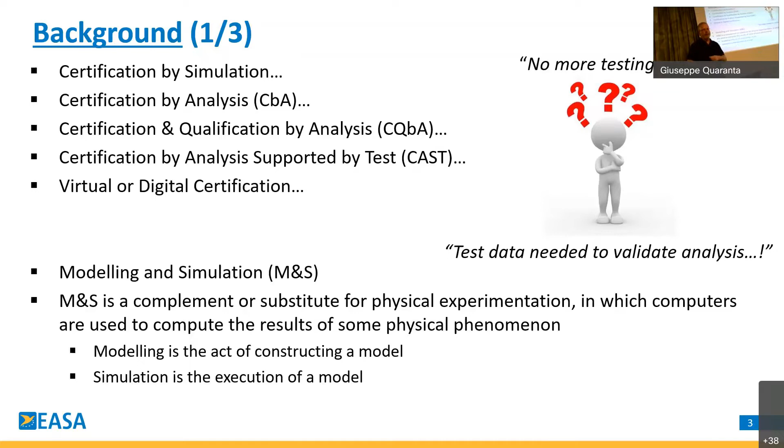Even modeling and simulation covers a lot of different things to different people. In the scope of this presentation, we focus on what we call the certification qualification phase. We're not talking about the development phase, where modeling and simulation is also used extensively, nor about what happens in service, like digital twins or structural health monitoring. We're really looking at the certification phase here.

We're focusing on structures, but within the structures community we have different flavors: solid mechanics, which is static and fatigue; structural dynamics, which covers crashworthiness and bird strike; and fluid dynamics, related to loads and flutter issues. We also have different behaviors - linear, nonlinear, static, dynamic - and different numerical techniques for discretization and meshing, breaking the structure into pieces to make analysis feasible. We worry not just about the solution process but also pre-processing and post-processing. So even within the scope of this presentation, it's already a complex set of activities.

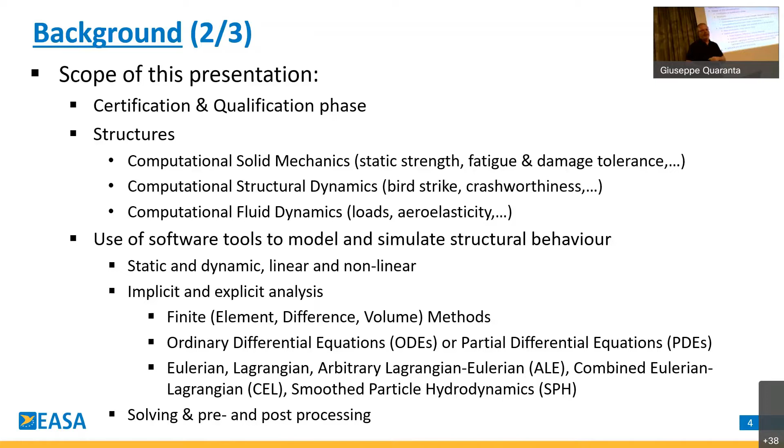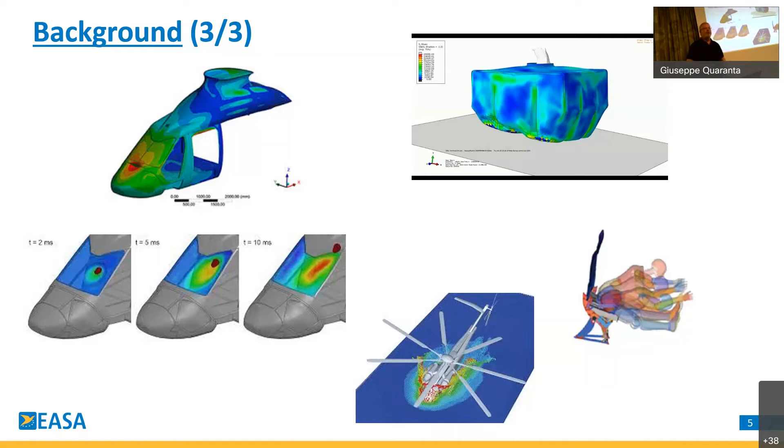So what we see in the structures community, and not only there, it's also happening in other disciplines, and it's also happening outside aerospace. We know that there is an increased usage of advanced analytical means, often accompanied by a reduction of physical testing. That's a trend that is definitely there.

Now, when it comes to showing of compliance, there has always been this mix of test and analysis. If you take a look at 29307, which is proof of structures, one of the key requirements in the structures build, it clearly says that you can show compliance by test only. That's an option, but it's not very often used because it's quite complex to build a specimen and apply all the critical cases. That's quite a challenge.

So in reality, you will see that compliance is shown by a mix of test and analysis. That is not new, but what is new is that the balance is shifting towards more analysis and less physical testing. So from a safety point of view, we're not opposed against that trend.

In fact, we see the benefit. We think that if you use modeling and simulation techniques properly, then you can have a lot of benefit, not only from an economical point of view, a better or more optimized design in the end, but you can also build a safer product simply because you can investigate much more conditions analytically than you can ever do by physical testing. So we definitely encourage the trend as such, but the key concern is always the credibility, or some people call it trustworthiness.

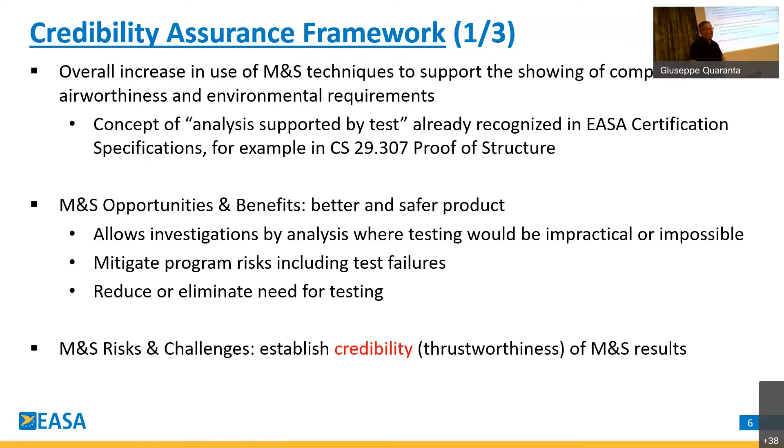So when it comes to credibility, we have developed what we call the credibility assurance framework. It's not something that we at EASA have invented. If you're a little bit familiar in this world, you immediately recognize all the terms. So we didn't invent anything new, it's a reflection of what's already out there.

Going through the elements, starting with verification on the left upper corner, and then going clockwise. The first element we have is verification, and that is both code and solution verification. Code verification is really about showing that your code, the software tool you're using, is free from errors and bugs, as much as possible, but also that the algorithms, the governing equations that you have programmed, work correctly.

Solution verification has everything to do with the quality of the model that you build, the assumptions you make, the meshing, the mesh quality, the mesh convergence, but also the numerical errors that you introduce by doing this simulation, just to name a few examples.

The next one is validation, and that is probably what you're familiar with. So you have test data, you have analytical results, you're trying to compare the two, which sounds easy, but it can be quite tricky. First of all, you need to agree, how do you compare things? If it's two numbers, it's relatively easy. If it's a time signal that you want to compare, it's already more complicated.

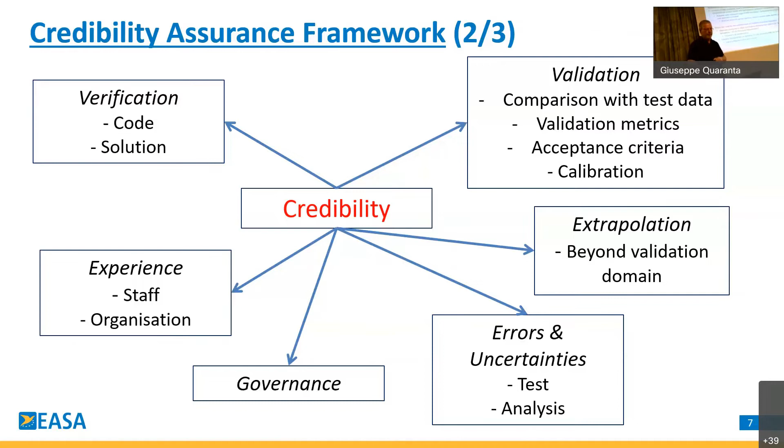There's always this mix of test and analysis in showing compliance. Up until now, and likely in the foreseeable future, there's a lot of emphasis in the structures community, and outside it too, on test data. That has always been our bread and butter of certification: you do an analysis, and we ask you to show test data to validate it.

But this balance is shifting. We see more advanced and complicated analysis with less test data for correlation, so we need a new strategy. We need to spend more time making sure the modeling and simulation is credible—the quality of it is becoming more important. I have to admit, as regulators we haven't paid much attention to this in the past, because we were in the comfortable position of having a lot of test data to correlate to. But that is changing.

I want to draw your attention to two activities happening in the CS25 fixed large airplane world. First, we published a certification memo last year on modeling and simulation, focusing on CS25 structures. That CM is available on our website, and contains all the elements I showed regarding credibility. It's published as a draft to draw industry's attention: if you're in this business of modeling and simulation, you better make sure you do a credible job.

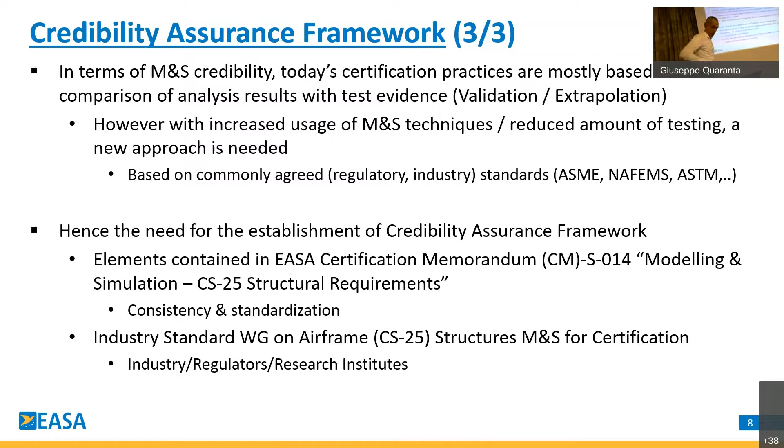This second part of the presentation is probably to reconnect with the CS27-29 objective. What has been explained by Wim is valid for CS25, large aircraft, but also CS29 and 27. 27 is small aircraft, small rotorcraft.

But before moving to some examples which are going to be given to you, I would like to briefly remind some specific features for rotorcraft: single load path with catastrophic consequences. We have many parts like this on rotorcraft compared to large aircraft. What does it mean, single load path catastrophic? We have PSE's classification, which addresses the fatigue issue under 571 compliance requirements. And we have also specifically, which does not exist otherwise, critical parts, addressed specifically for parts on the rotorcraft with catastrophic consequence.

The purpose is to have better control of the manufacturing process, which is one element to control on rotorcraft, and on large aircraft of course. We also have design criteria for mechanical parts. We do not design a mechanical part which is highly fatigue loaded under static criteria, it's done under fatigue criteria with fatigue limit. So if we target, say, 400 MPa on aluminium, here on the mechanical part we will target far less than 100 MPa as a maximum stress in the part.

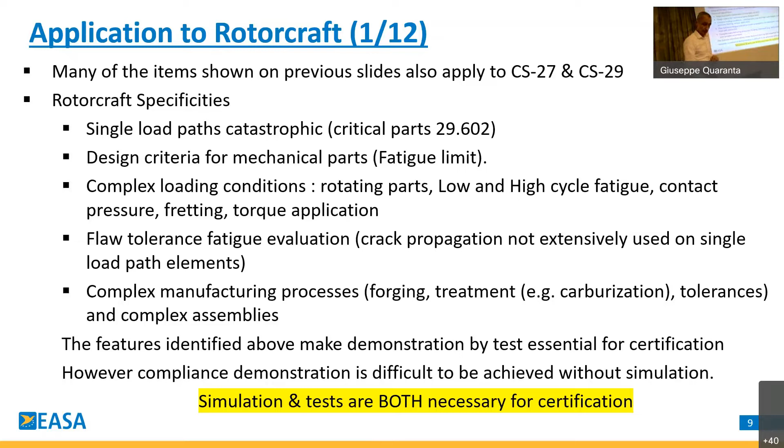Now I will give you some examples of what we do for modeling or simulation. I will start with airframe for static and fatigue strength with the general or global finite element model, which is currently used in general for certification. I will briefly remind what we are doing for mechanical parts, impact, we have seen a nice bird impact before in the presentation, fuel tank crashworthiness, ditching and flotation emergency condition, and I will finish with the rotor drive system.

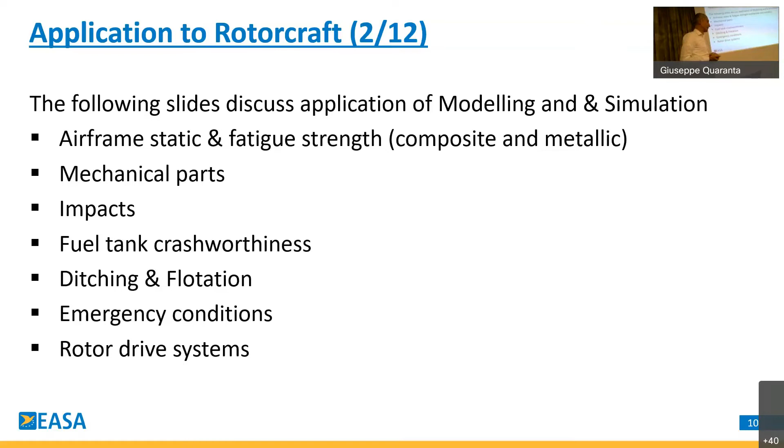So first, airframe. One significant activity when we justify or certify airframe is the construction of a global finite element model. However, I would like to mention that for static aspects we have one requirement. We address also the fatigue under another requirement, and we make distinction between composite and metallic. Of course, what is also available for certification is the 29307, which is a proof of structure concept, also developed under the 25 requirement.

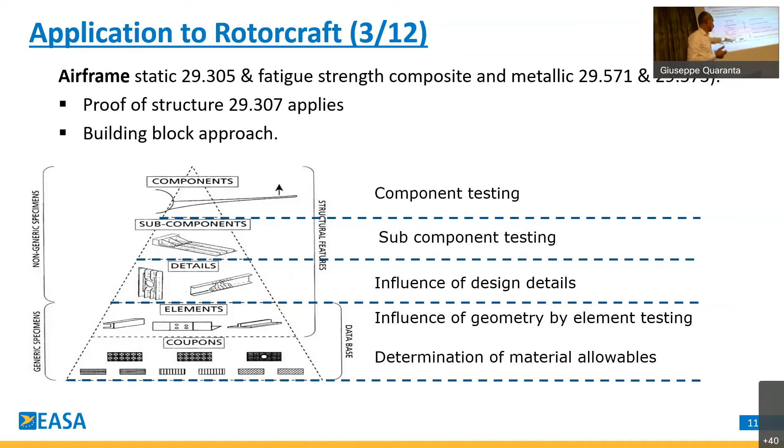And we have, of course, this famous building block approach, which is well known. We start from coupon to component. Here you can see this is extracted probably from a large transport aircraft certification example, but you can replace the wing by the tail boom, or replace the wing by the cabin, the complete cabin installation. But the principle is to go from the bottom, at material level, up to the full structure.

So for airframe, what is done in terms of a global finite element model? And also, what is the objective?

The objective for certification is to have a comprehensive understanding of how the loads and the stress, and at the end the margin, are distributed inside the structure. This is the purpose of a global finite element model.

The review done when the applicant develops this finite element model is to ensure the software selected is appropriate. We take the information, but we do not investigate too much, since it is quite often the same software selected by any applicant, or a very limited number of software. We also look at the modeling techniques, how the model has been built and constructed, and we check the load application.

For the validation process, what is done in general is we want to know how the load path is well distributed within the structure. If you install a spar, we want to be sure it will work under a bending condition. If you have a box, we want to be sure it will work under a torsion condition. All these aspects are to be correlated with something.

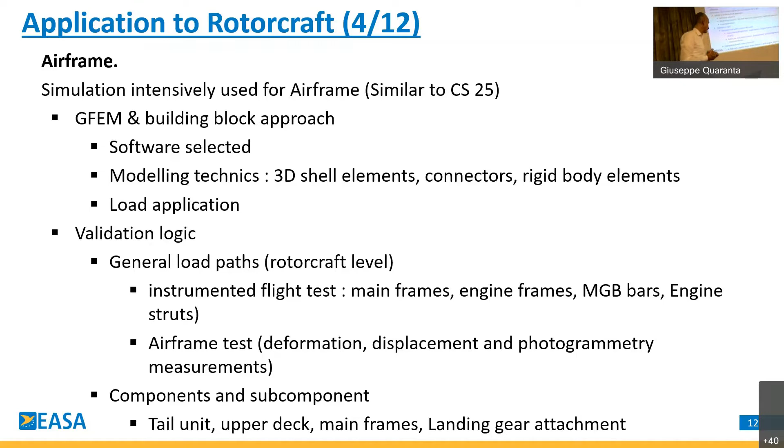What is interesting is that it has become a little bit conventional to do this correlation. We know now which parameters have to be measured and recorded, and we can establish quite a good correlation between simulation and the test campaign, whether flight test, static test, or fatigue test. This is a conventional activity for certification.

We have about the same status for mechanical parts. Because the loading is quite complex, we have instrumented parts, with strain gauges placed at the critical locations, which are quite often determined thanks to the simulation.

So we calibrate these strain gauges, fly the aircraft, and run a flight test campaign with this part instrumented and calibrated, and the correlation is done at this level. During the test campaign at the part level, we validate the static aspect, which is not too much of a problem for the helicopter, and we validate the fatigue test and the limitations associated with the fatigue test campaign.

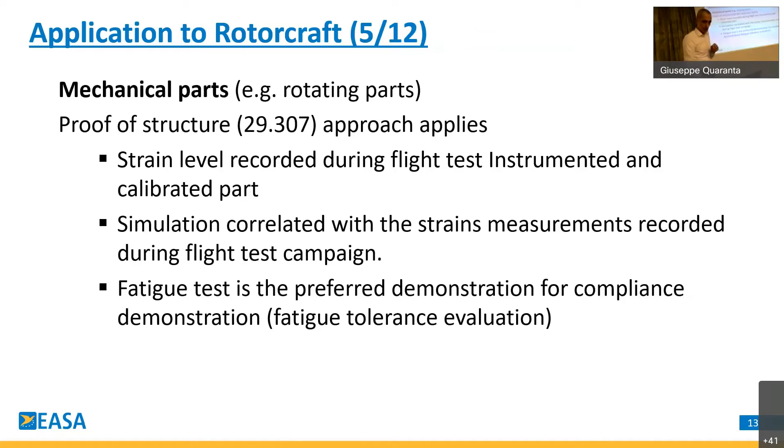For global finite element model or mechanical part certification, the process is quite standard. We have clear references to establish correlation between simulation and test, and we know which parameters have to be controlled. I didn't mention all the other criteria addressed by Wim, but we will see in the conclusion that this is probably one aspect where we have to improve the review of the simulation and address more aspects in its validation.

Bird impact simulation is now also quite standard. But the problem is it is a dynamic correlation, so before moving to the detail, it is still quite complex to correlate simulation and bird impact tests.

Recently we had some experience of bird penetration inside the structure when the simulation was showing no penetration. We can say, oh yes, it was because of not selecting the right material properties in the simulation, or something like that. There is always a good reason to explain why we do not correlate, but the problem is at the end, we didn't succeed the first time.

What is a little bit more complex compared to basic static or fatigue correlation is the parameter to be selected. For bird impact, one pass-fail criteria is no penetration, which is quite easy to check. But we also want to check how the structure has been deformed, how realistic the time of the peak pressure was, and the shape at the time of impact.

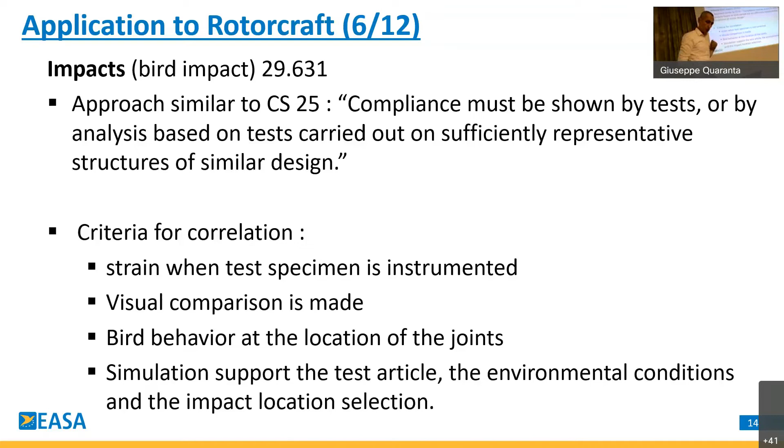What is the same level? So I would like to say that when we move to impact or dynamic test, the situation becomes a little bit more complex. Fuel tank crashworthiness.

I just also want to mention that, because sometimes we discuss, do we need to simulate, do we need to test? Sometimes the rule does not allow you to discuss about test or simulation. When we have some requirement, drop test requirement, it must be drop tested. So no discussion at this level. But it does not mean that we do not need to do simulation. We need to do simulation.

For example, in this case, it is the fuel tank drop test, the 15 meters high drop test. We need simulation in order to select the most critical tank. Or we select all the tanks and we go for a drop test.

Here also, what I want to say is the same problem as for the dynamic bird impact. We still have some problem to correlate with, I will say, a robust parameter.

The requirement for fuel tank is quite severe. It's a 15-meter drop test with all the equipment installed on the bladder or on the fuel tank installation, and with the surrounding structure. So we do not succeed, at the moment, to fully correlate in general because of the complexity of the installation. We have problems to fully correlate this kind of requirement or this kind of test.

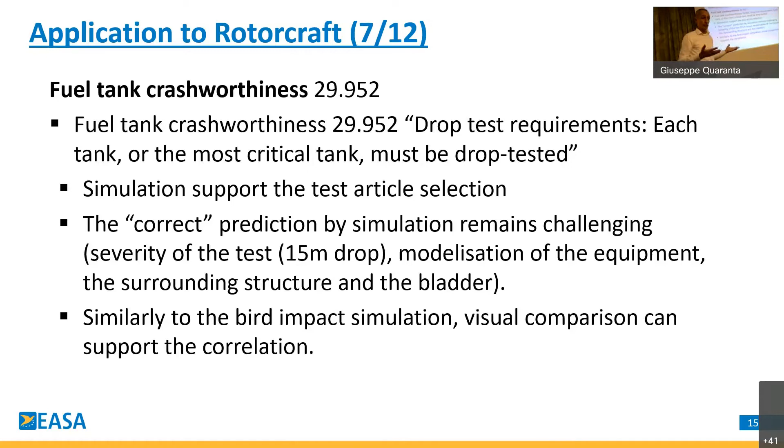And still the conclusion for that, it's that similar to bird impact simulation, visual comparison can also support the correlation, but sometimes the pass-fail criteria here is no leak, no fuel leak. This is difficult. So we strongly rely on test.

Ditching flotation, just to say that in general, this is an example where tests are not sufficient. Full-scale rotorcraft test for ditching is not part of the requirement. We do just ditching evaluation with pressure at the airframe level at time of ditching, and we have also some consideration for flotation time.

And in this case, we do simulation, and we have some scale model tests performed. The correlation is done between simulation and scale model test, and then we extrapolate to the full-scale rotorcraft. So here it's an example where without simulation we would be very limited.

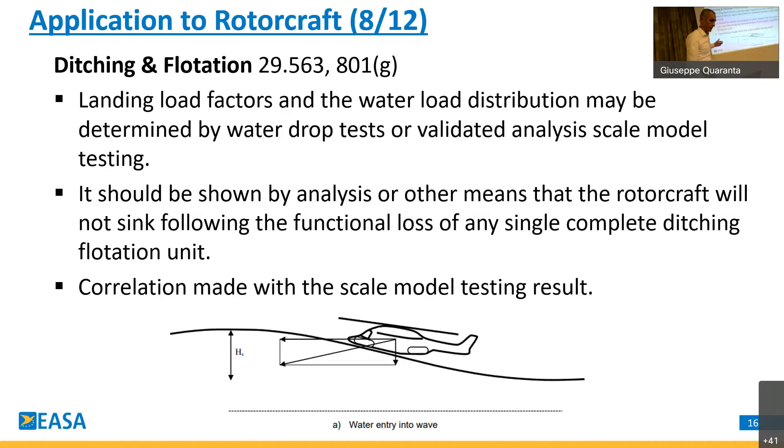And also the only area where there is some dynamic test or dynamic evaluation to be performed is for seats. But because the configuration of a rotorcraft is quite simple and the seat configuration is limited, in general we do not have to go to a dynamic simulation to do some selection of the seat to be tested. So, again, because of the product to be certified, we do not have exactly the same need in terms of simulation compared to larger aircraft.

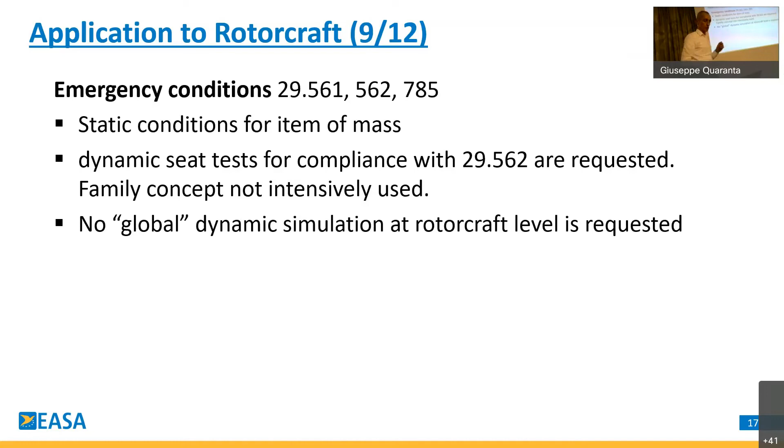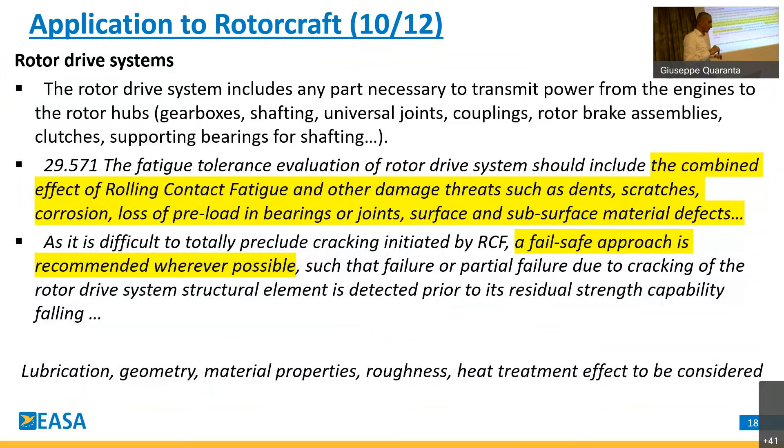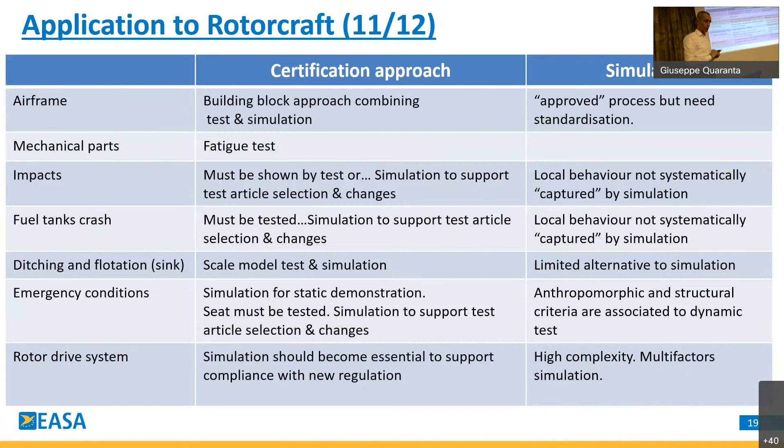Again, both simulation and test help us to have a comprehensive understanding of a structure, how the structure will work in terms of load path or stress, and at the end to derive or obtain the proper margin and justify it on fatigue, static, or any other criteria addressed in certification. Thank you. So now I leave Vince to do the final conclusion.

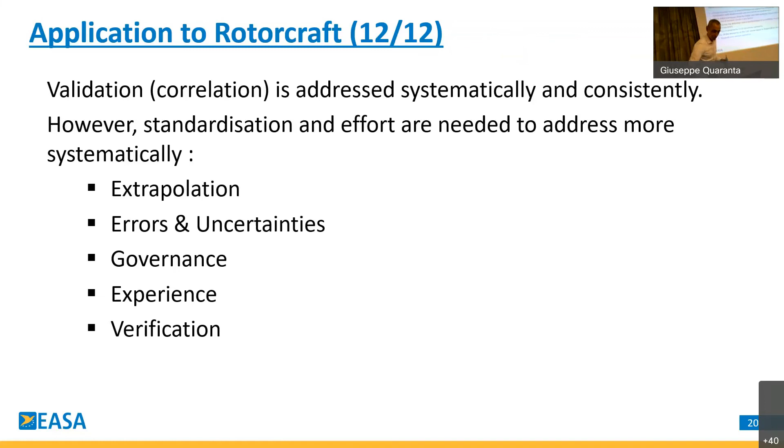So just to wrap things up, what we've shown you - we fully realize that the same thing happens in flight tests. This is within EASA, which defines synergies in different areas, and also looks at structure with the same question. So there's definitely some work to be done. We see this trend, and from a safety point of view, we see the benefit: a better, reliable product. From a safety point of view, we also see the benefits of analytical methods alongside physical testing.

However, credibility is key. And we think you better do the job well and consider what we said is happening in this field.

Sorry to interrupt. I don't know if it's just me, but I have a really hard time hearing you. Sorry, okay, sorry for that. I was stepping away from the camera. All right, thanks, way better, thanks.